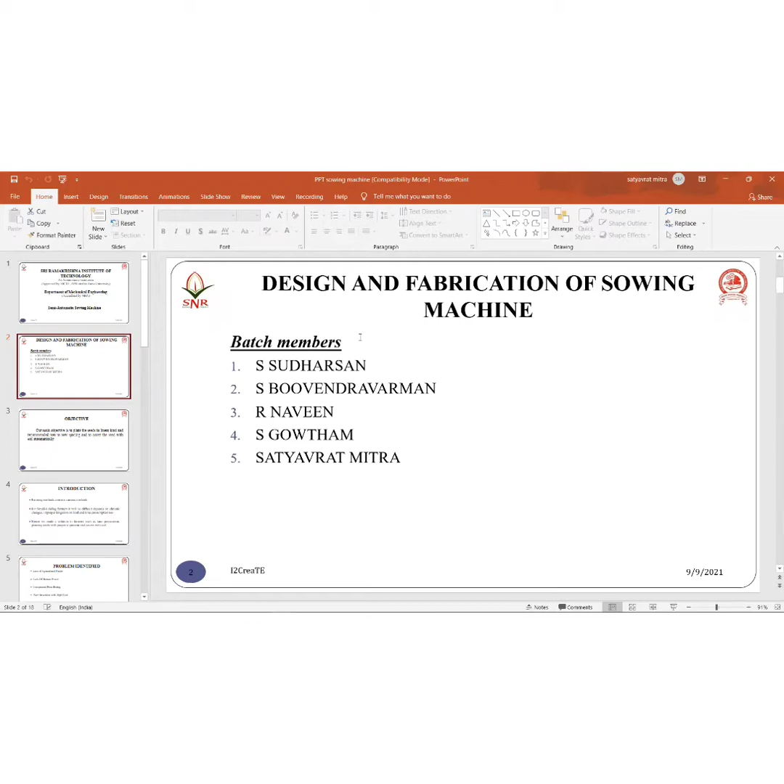Our main objective is to plant the seeds in a linear kind, recommend row to row spacing, and cover the seed with soil automatically. The basic function of the sowing operation is to put the seed and fertilizer in rows at desired depth and seed to seed spacing, cover the seeds with soil, and provide proper compaction over the seed.

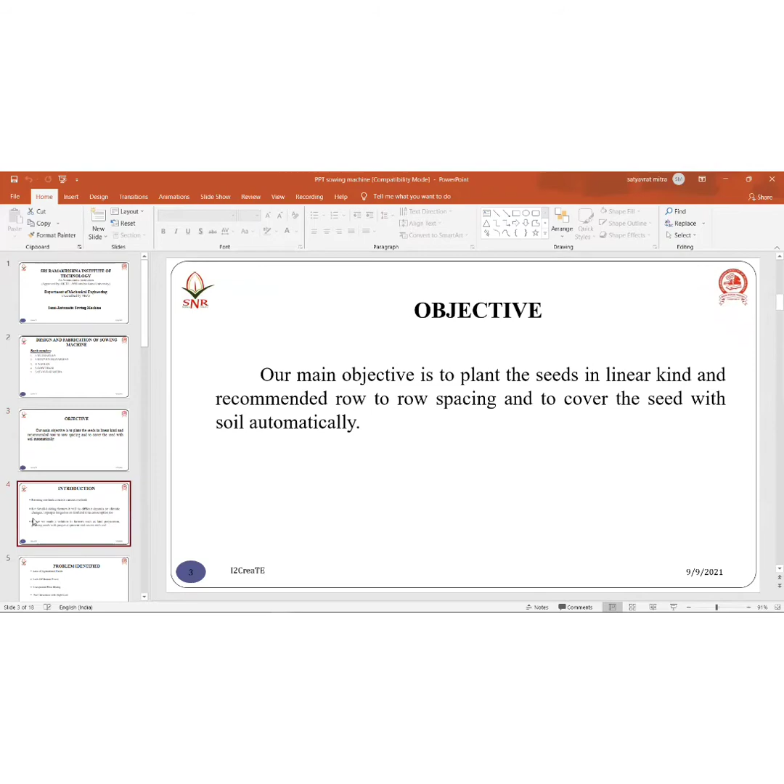Introduction: farming methods consist of various approaches. For small holding farmers it is difficult, depending on climatic changes, improper irrigation on land, and time consumption too, which is obvious. Hence we made a solution for farmers such as land preparation, planting seeds with proper alignment, and covering them with soil.

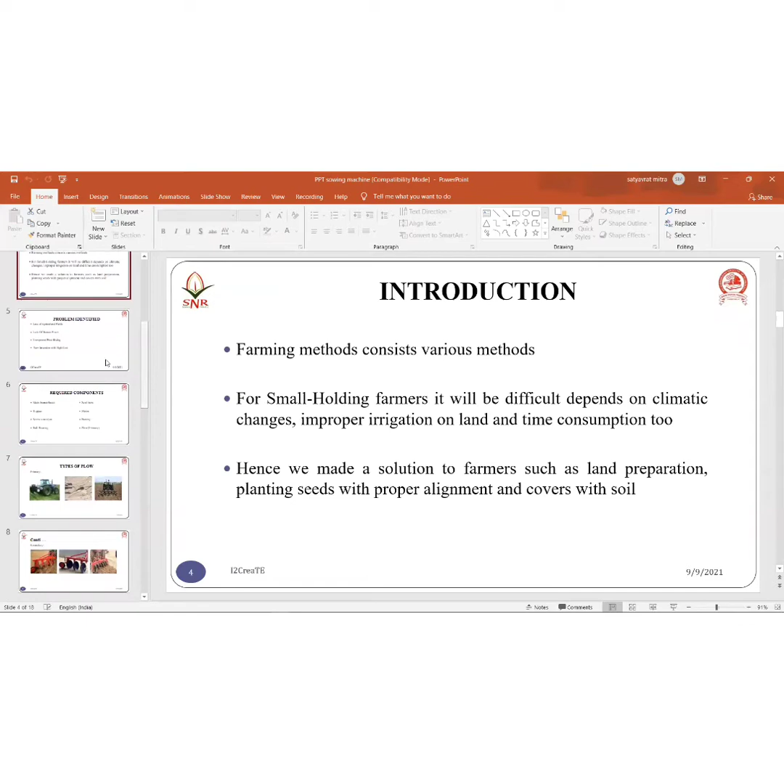By doing so, we identified some problems: loss of agricultural fields, which is a common problem nowadays, lack of human power, which is obvious too, unexpected price rising, and new inventions with high cost which are unaffordable.

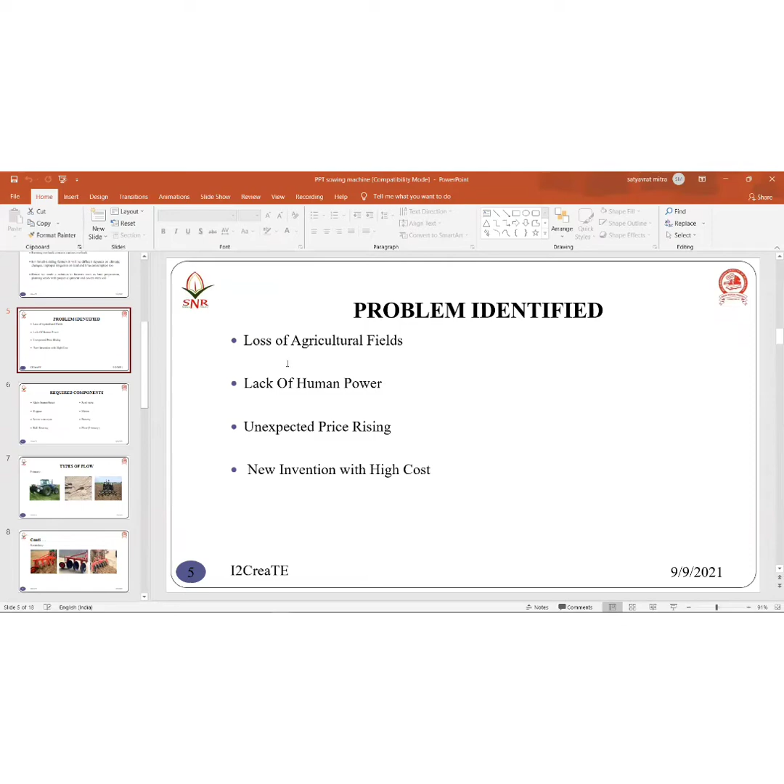Next is the screw conveyor. Its function is to push material as the screw rotates in a fixed pipe or housing using helical screw blades. We also have the ball bearing, which we all know, and the seed tube, which carries the seed from the device to the boot.

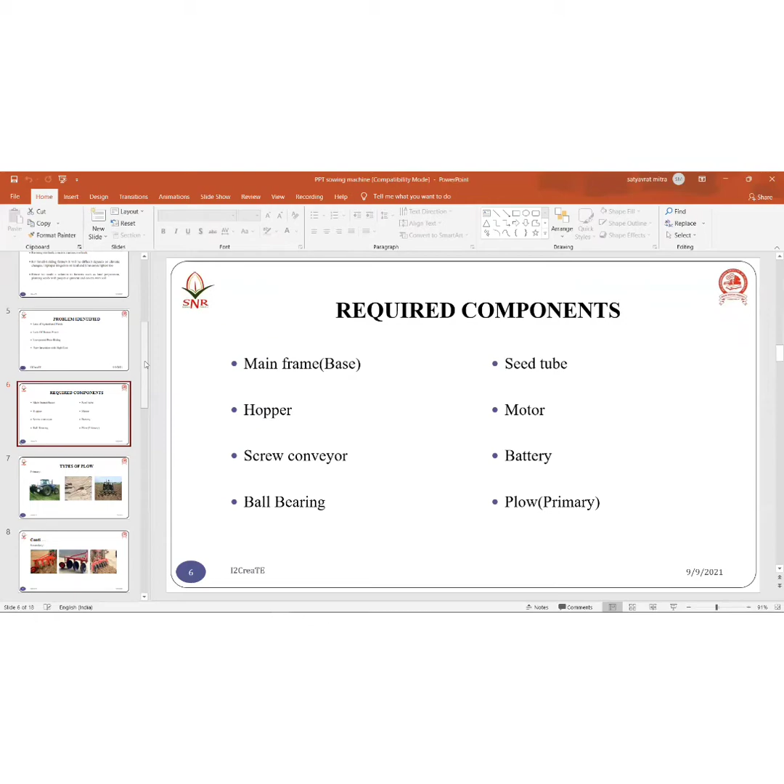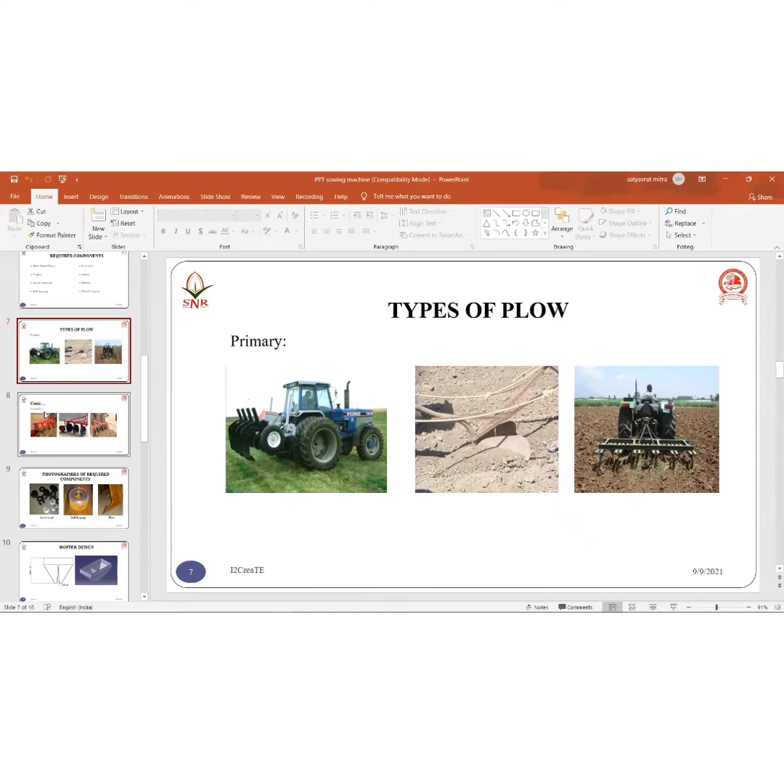Other components include motor, battery, and plow. The plow tool is used for loosening and turning the soil before sowing seed. There are two types of plow: primary and secondary. The primary plow is used to attain a reasonable depth of soft soil and kill the weeds. The secondary plow reduces the soil to a final tilth, levels the surface, and is also used to control weeds.

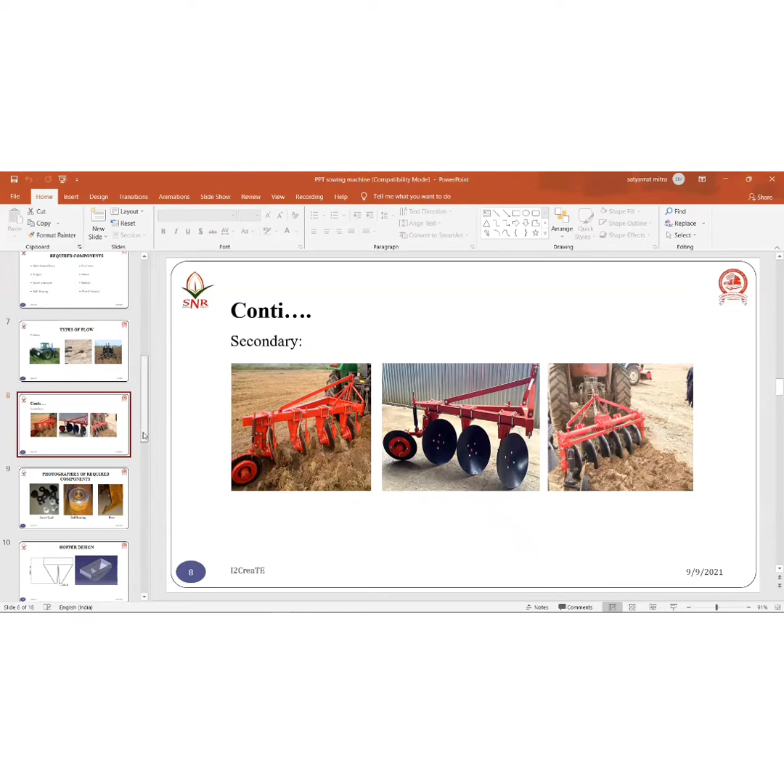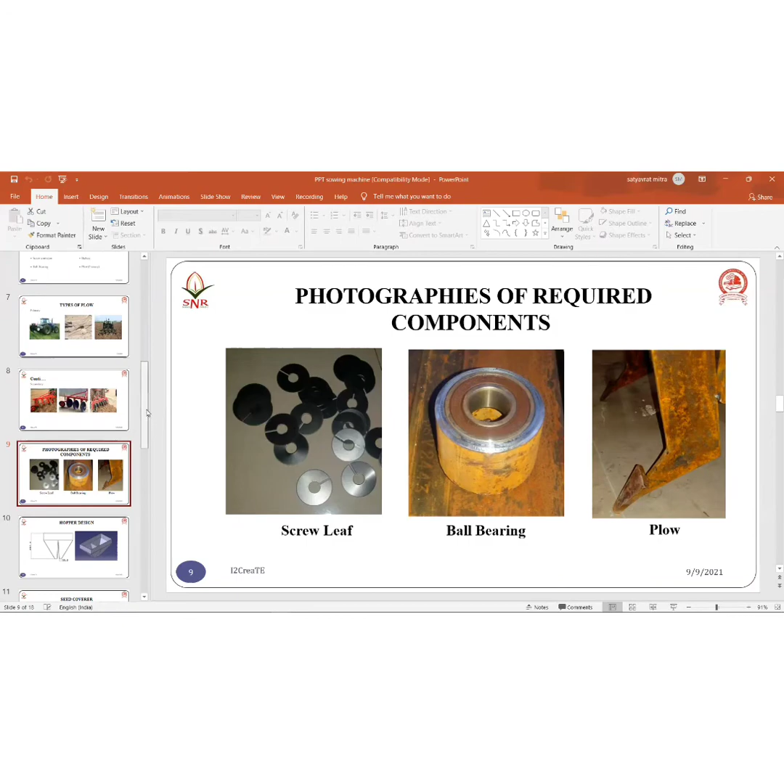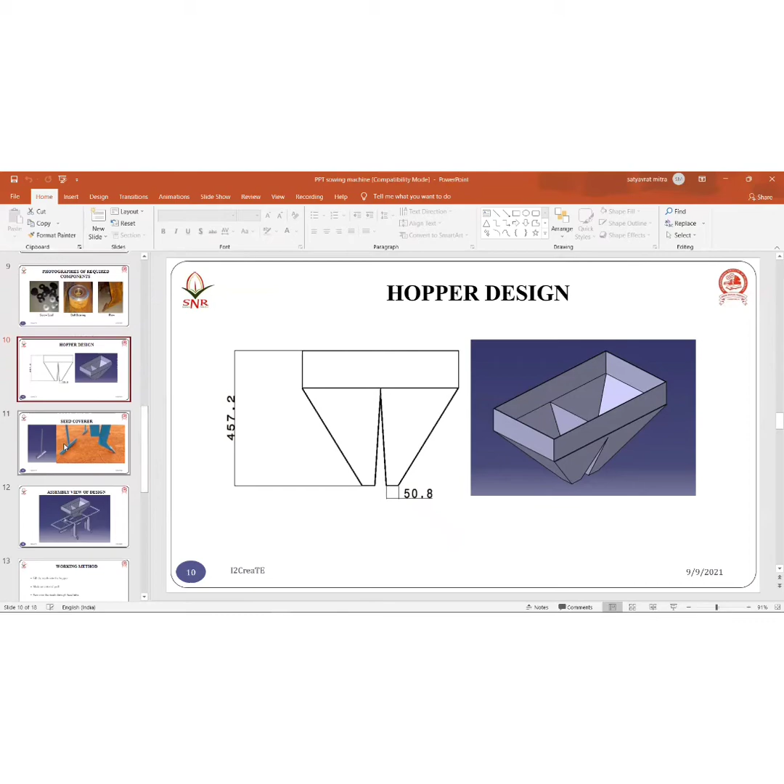Next are photographs of the required components. This is the screw leaf used in the screw conveyor, this is the ball bearing, and this is the plow. This is the hopper design - as I said, the hopper is a large cone-shaped container. You can see it here, shaped like a cone. This is the seed cover which is at the bottom of the hopper.

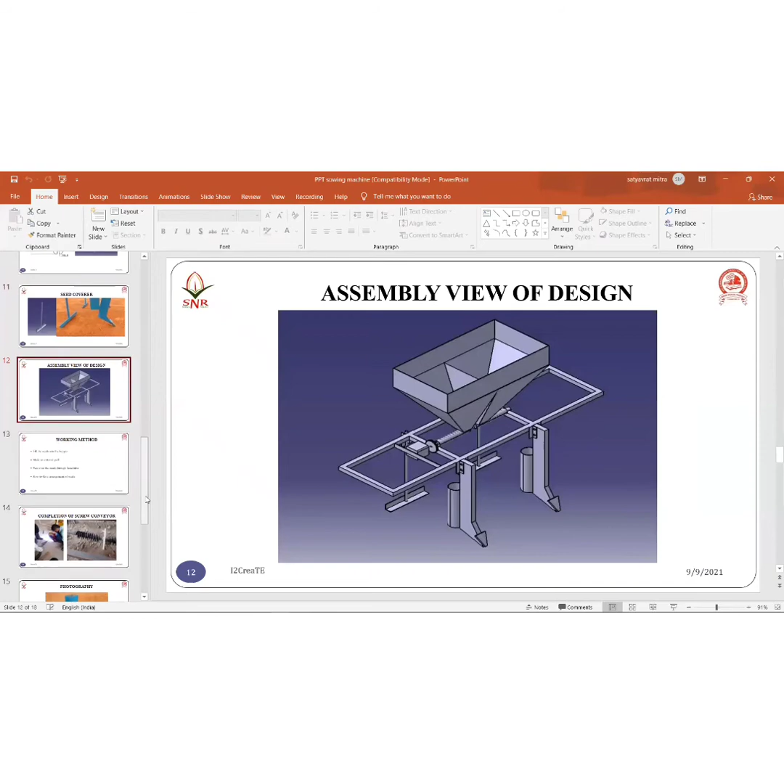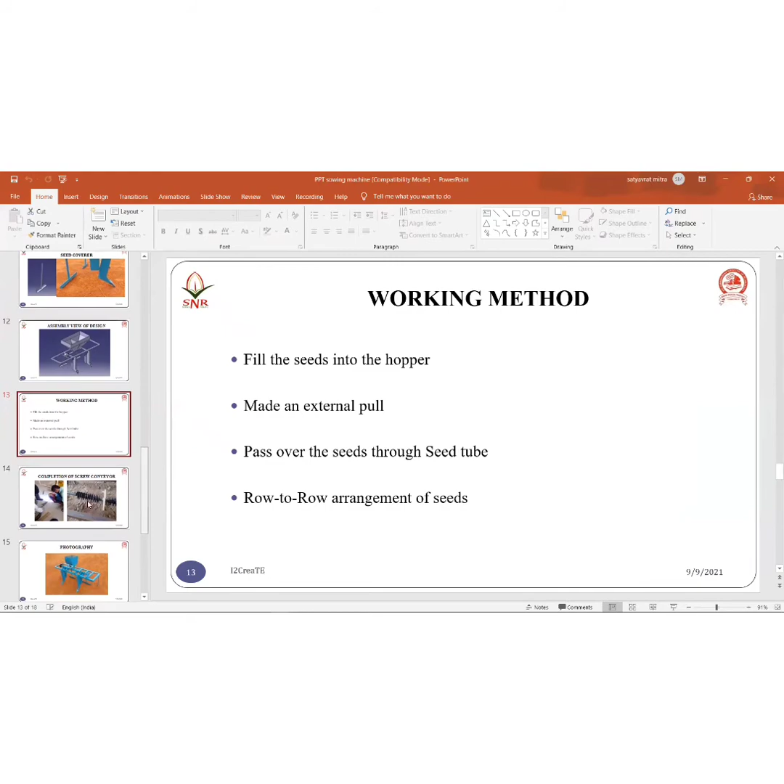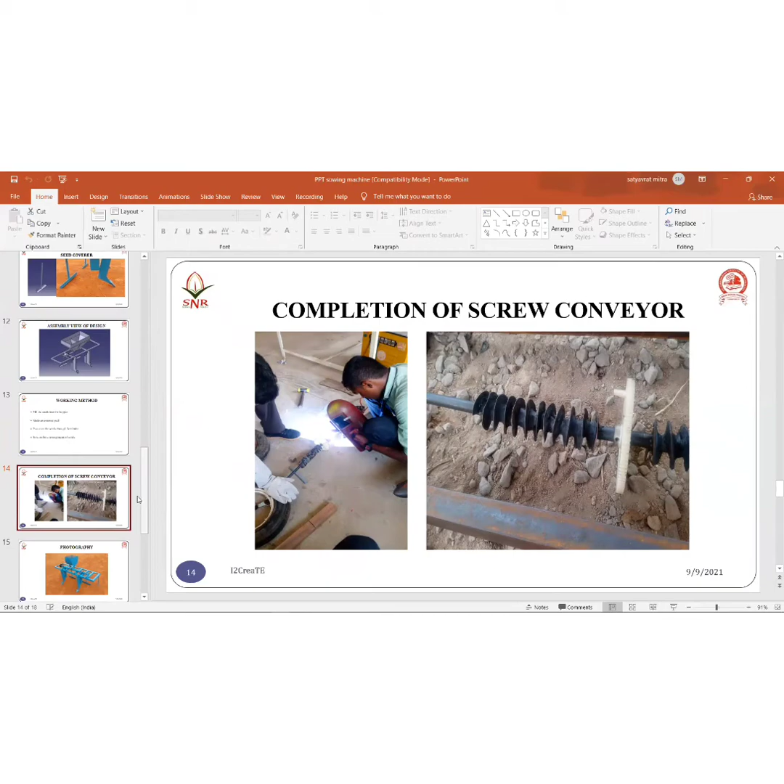Now we move on to application and advantages. This machine is not only used for sowing rhizome seeds but also for purposes like grains. It can also be used as a plowing machine by disassembling the hopper attachment, and it can be used for planting cereal crops with some modification.

As for advantages, this planter will be more affordable for small holding farmers, easy to operate, and skilled persons are not required. If you know a little bit about it, it will be easy to operate, and it will help increase the production rate a lot.